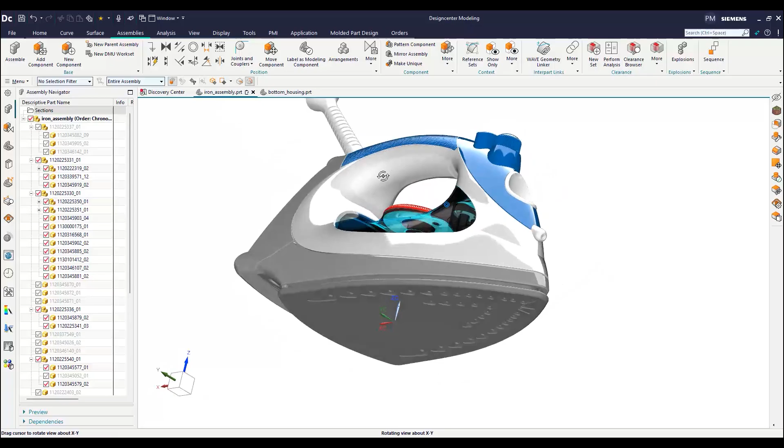In this Tips and Techniques video, we will explore NX molded part design. Our project today is a new clothes iron. Most of the work has already been completed, but the back-end piece was being developed by a contract engineer who has left the project. We need to continue where their work ended, check it, and complete the design.

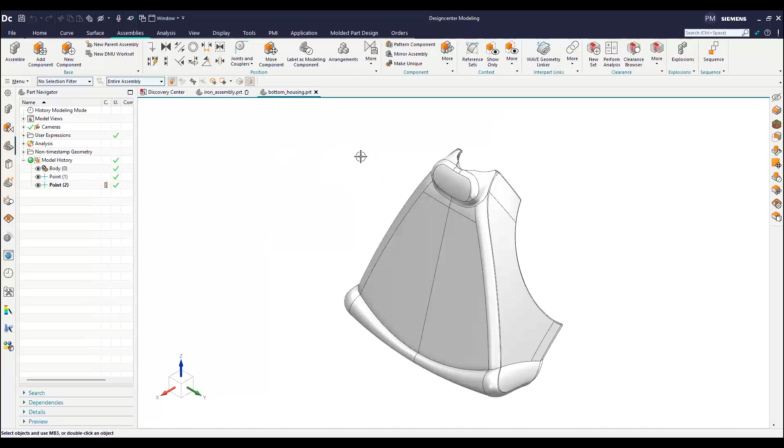As you can see, this part needs to fit around some wires and attaches at 2 screw bosses and a couple of snap clips. Let's open that part to examine it more closely. The outer shell is complete, and we can see that several interior ribs are already created. The contractor also created reference points for the mounting, but has not yet designed those mounting features. We will need to create the appropriate attachment features at those locations.

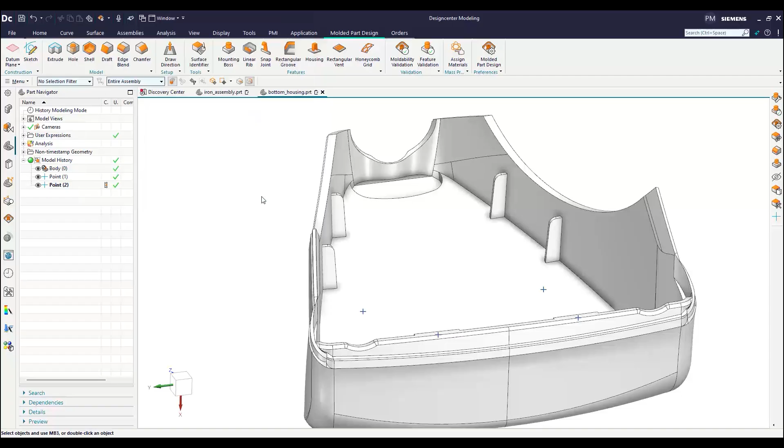To start, I will define the mold opening direction so that subsequent commands can consistently use it. Now I want to check those ribs to ensure the contractor completed them as required. But first I will confirm the checking parameters are set up to our company standards. The contractor sent this part as a step file, so there are no CAD features I can use to quickly review the ribs. However, I can use the feature validation command to quickly check them.

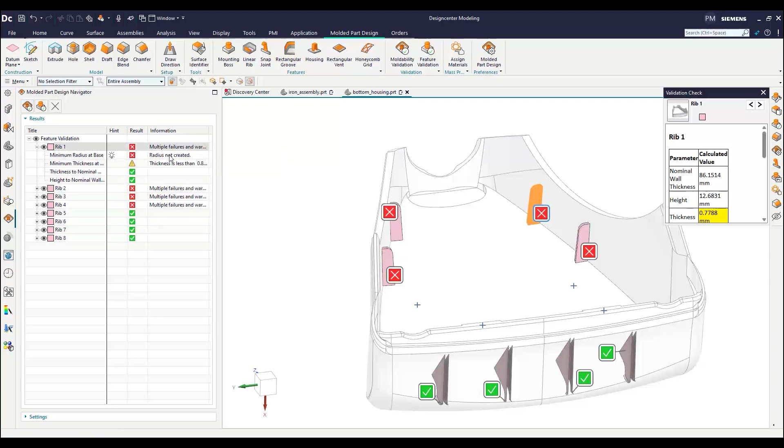The results show that the 4 ribs at the back end look good, but the ribs on the sides have warnings. One says that the ribs are too thin, the other that there's no blend at the base. It's recommending that I can use the edge blend command to fix it, and I will check the details so that I understand what needs to be done. I have no CAD parameters to edit, but I can use synchronous offset to directly modify the ribs, adding extra material to each. Next are the blends.

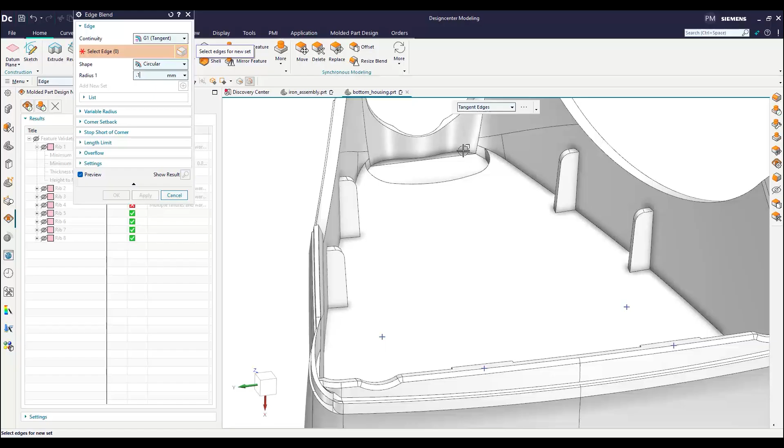To start, I will blend along the vertical rib edges. Notice that I only had to select one vertical edge, and the AI-driven selection prediction functionality found 7 similar edge chains. I will confirm its findings and have it complete the blends. Similarly, when I select one edge at the base of the rib, selection prediction finds the other rib chains for me, which I also accept. When I update the validation, all ribs now pass the requirements.

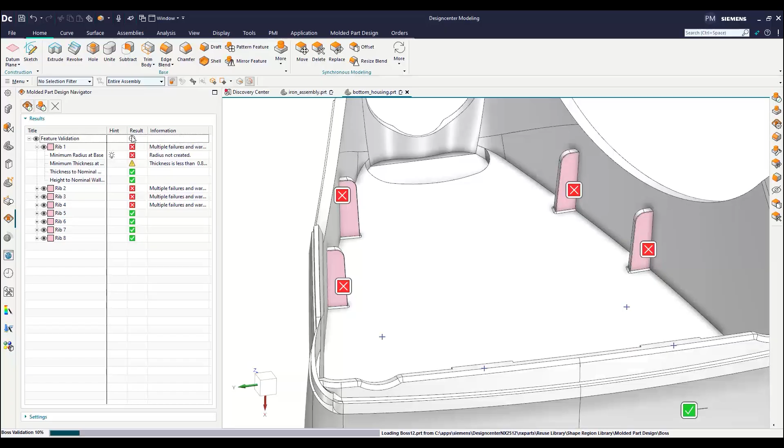I now turn my attention to creating some new bosses to use with the mounting screws. I will place them at the points provided by the contractor's model and enter the appropriate sizes. The legend allows me to easily understand what each parameter means. I will ask to have ribs automatically created around the bosses because they provide the necessary strength around the screws.

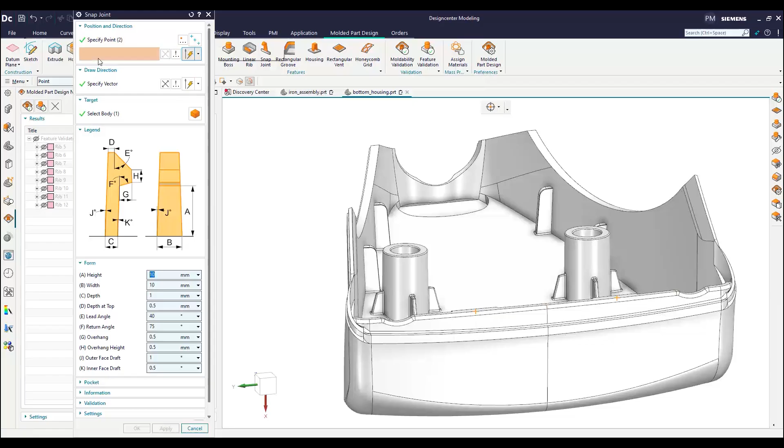I will next create 2 snap joints near the bottom, again using the points provided and inputting the appropriate values, taking account of the legend to understand each parameter. With these complete, I will run the validation again to check that the new features are acceptable. The snap joints passed, but the mounting bosses show warnings. Let's select one to see what the issue is.

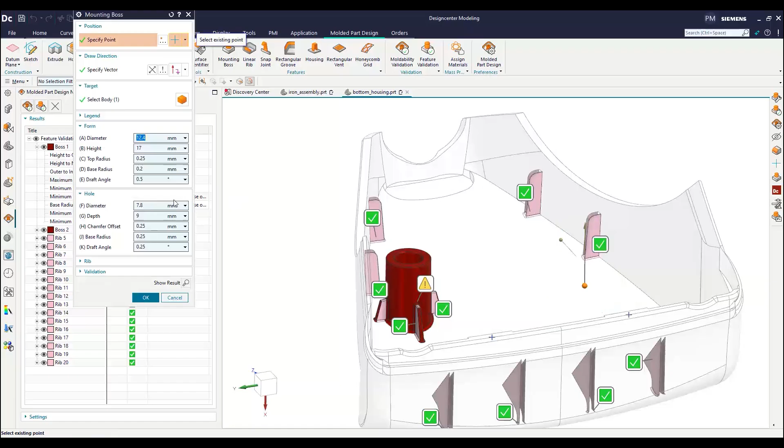It appears that the base radius is too small per our standards and needs to be increased. We can easily do that by modifying the feature parameters for both bosses. When complete, we will update only the out-of-date validations on the bosses to save time. And now everything passes. Just a few more details remain.

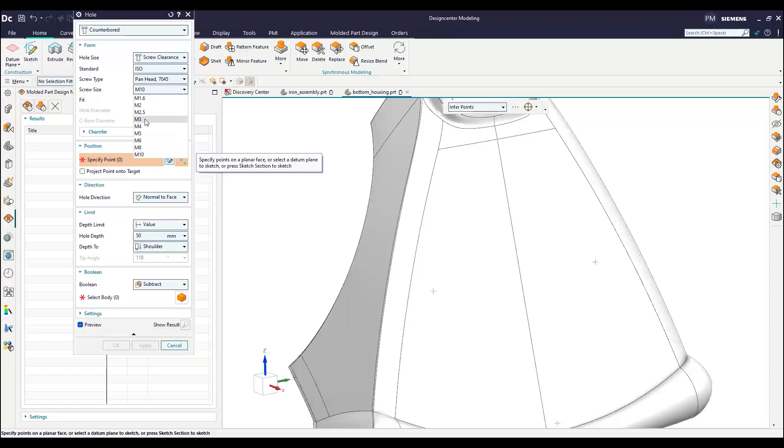We need to add a hole in the middle of each boss for the screws to fit through, and a counterbore to accommodate the recessed screw heads. I select the same mounting points used to create the bosses and enter the appropriate parameters for the counterbored hole. Now I will add draft to the counterbored hole so this part can be correctly molded. Notice how selection prediction is again helping me select similar geometry.

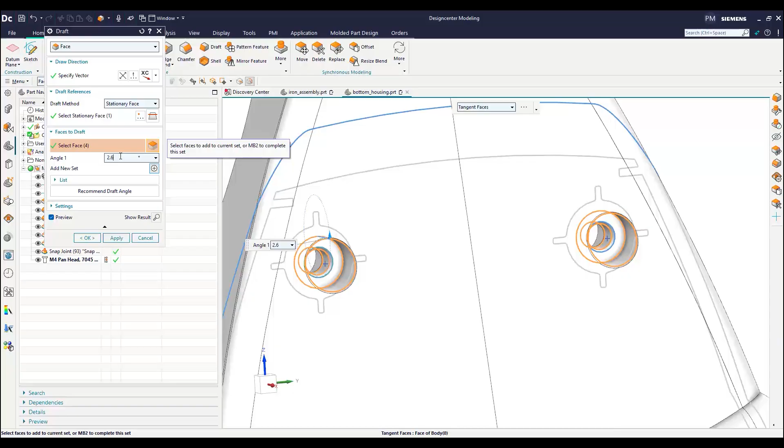I will ask the command to provide a draft angle recommendation based on the material, ABS, and I use the recommended 2.6 degrees. Finally, I add a 1 millimeter blend around each counterbore, again with some AI assistance, and we are finished with our part of the job.

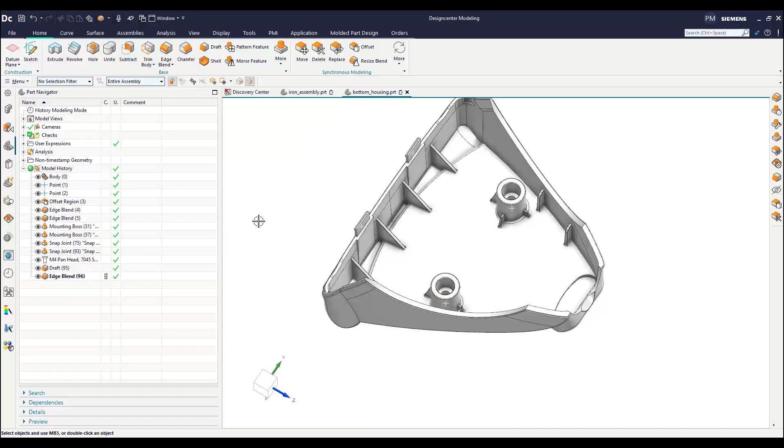In review, we have taken a partially finished part from a contractor and modified some of the ribs to meet our requirements, added bosses and counterbored holes for the mounting screws, and 2 snap tabs. We also validated all these mold features against our company standards.